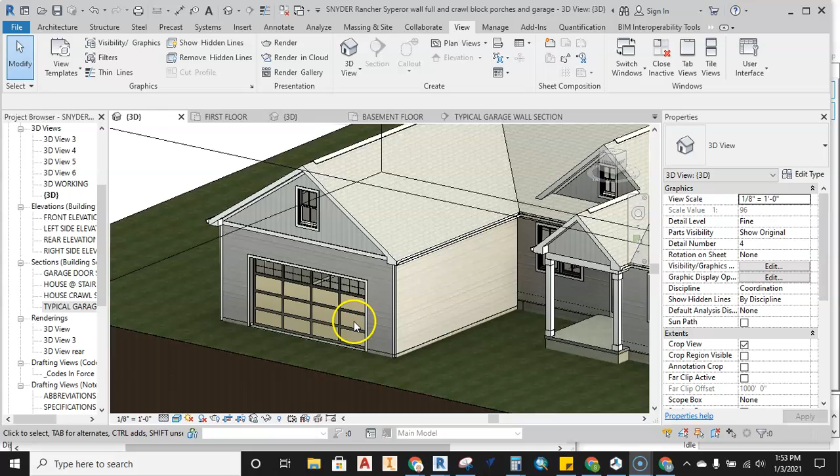So when we're taking a look at a typical garage wall foundation, you can see we have a 4-inch concrete slab. This is what the cars drive on. There's stone underneath, of course, undisturbed earth. Then you have your foundation wall, and this is a stacked wall.

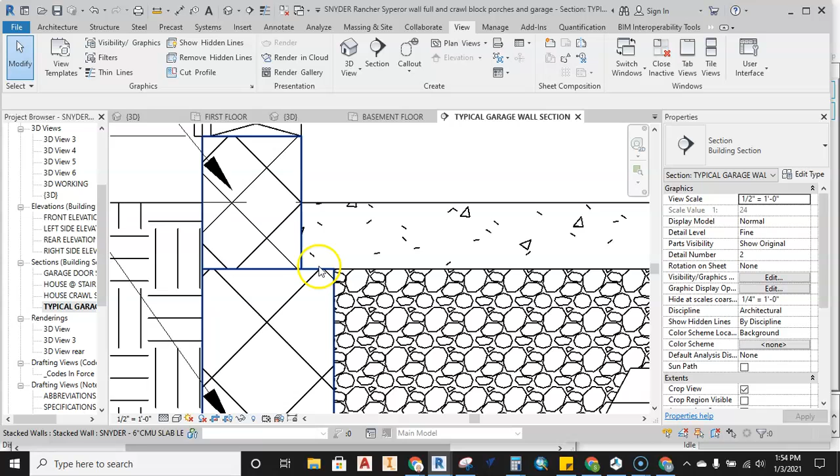This is a 16-inch by 8-inch thick concrete footing, and then we have our CMU 8-inch block that steps back to a 6-inch block at the top. What that does is it creates this ledge. This is a 2-inch ledge that the concrete can sit on, so it supports the concrete at the entire perimeter.

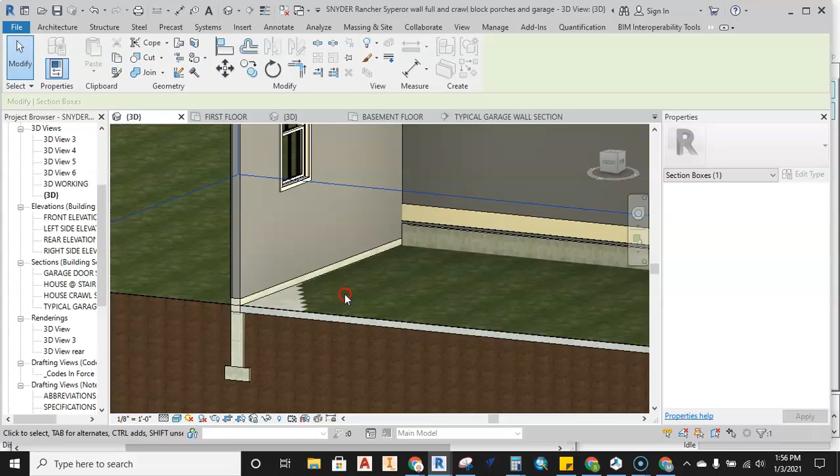This can be easily recognized or seen a little bit better here if I take this section box and drag this into the garage space. You can actually see how the garage slab here, this gray slab, is actually now sitting on top of that foundation wall. There's that 2-inch lip, and that slab sits on top of that foundation wall just like that. So there's your concrete and the slab.

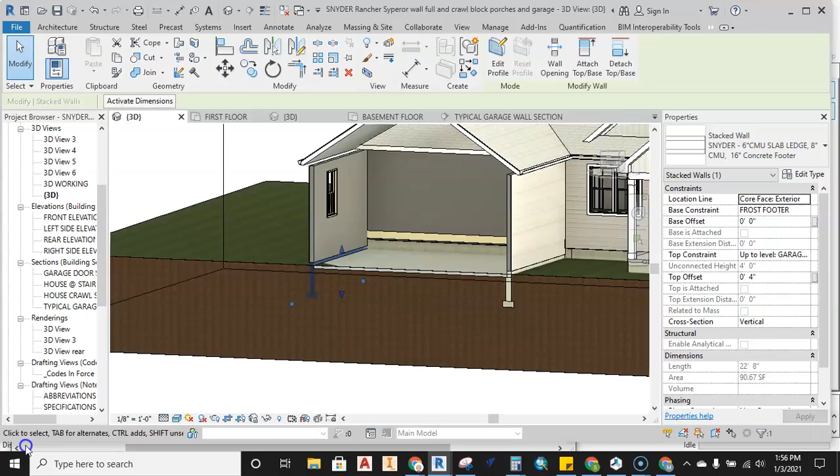So let's go ahead and start working on building up this stacked wall. Now, the stacked wall has 3 elements to it. The first is the 6-inch CMU, the second is the 8-inch, and then of course the last is the footer. You have to have these 3 elements built first.

So if you haven't built these elements before, and you don't have these built up in your project, then you need to build them. So in architecture, go to your wall tab, or your wall tool, and then you're going to come in here and make sure that you have these. So here's my 8-inch CMU.

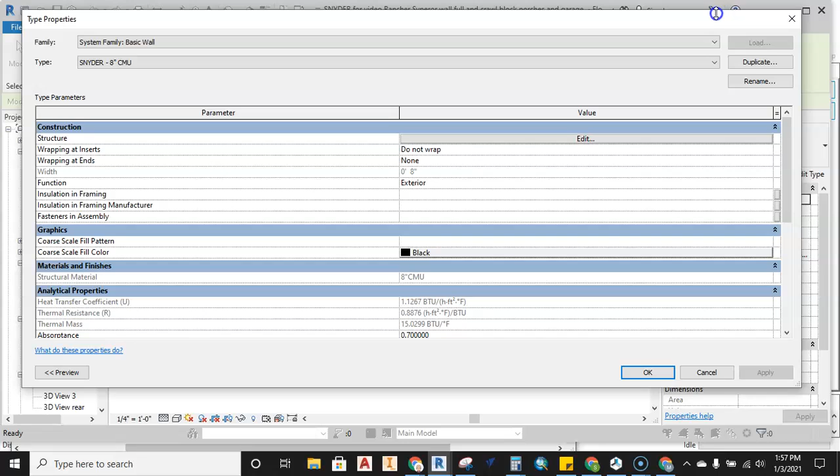If you do not have one, you can start a new wall. You can duplicate and rename this to be your 8-inch CMU. Go ahead and set your 8-inch CMU to 8-inch thickness. We should all have this by this point in time in the course.

And then also you wanted to do the same thing. You could take and make a 6-inch. So you'll go ahead and create the same thing for a 6. Now, I know that I have one in here somewhere. There's my 6-inch CMU. And then also you want to make sure that you have a footer.

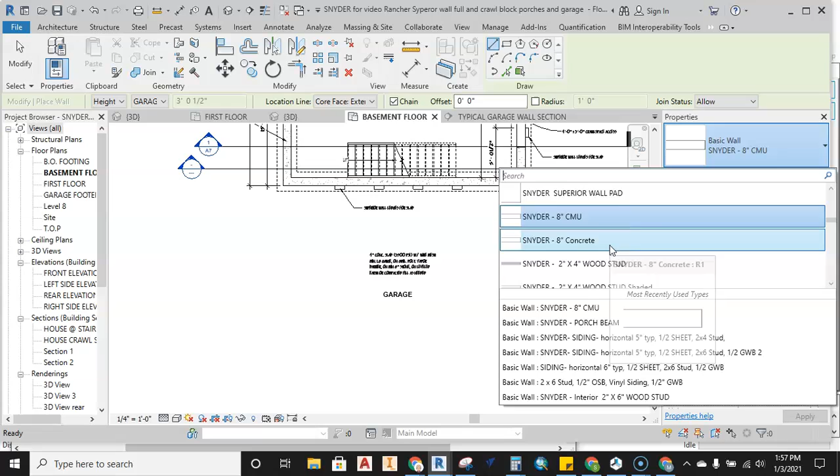So I have an 18, I have a 24. You got to make sure that you have the footers that you are looking for when you're going to go ahead and build out your stacked wall.

So once you have these elements put in place, then we can go ahead and start working off of the stacked wall. So I'm going to grab my wall tool, come here and go all the way down to the bottom of your wall options and find all your stacked walls.

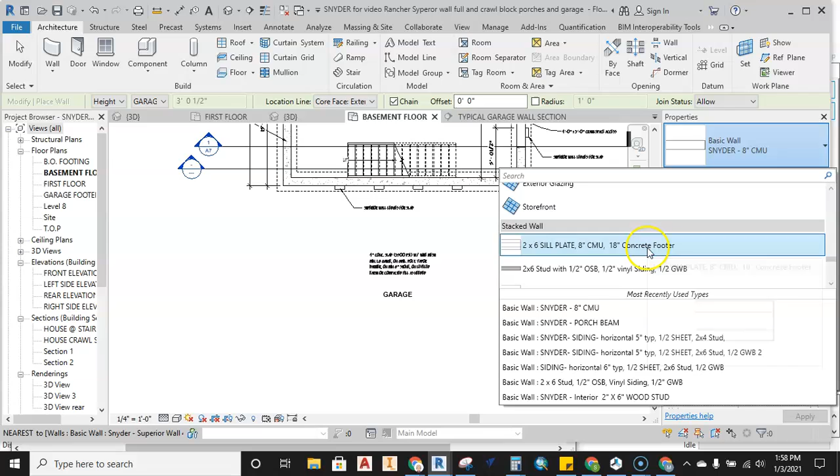So here's stacked walls, and the footer that we're looking for, or the stack wall that we're going to build, is this 6-inch CMU, 8-inch CMU. Nope, not a 12 - we don't have a brick ledge on it. So let's keep going down here.

We're going to do a 6-inch CMU slab ledge, 8-inch CMU with a 16-inch concrete footer. So this is the actual wall we're going to build.

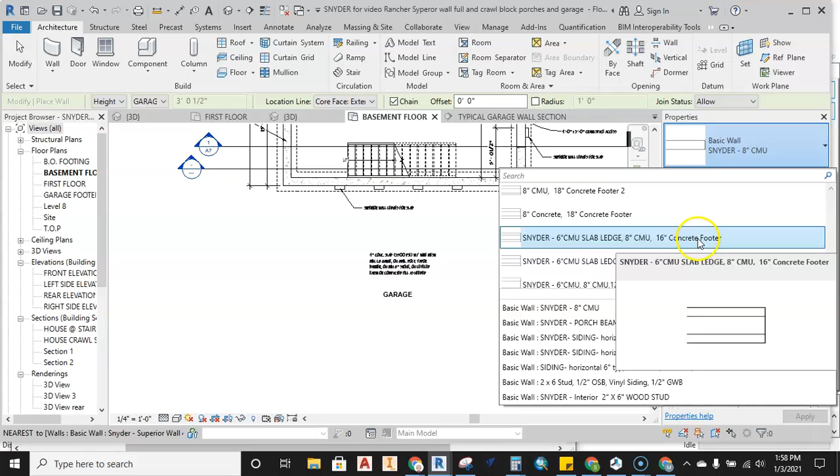So let's go ahead and take a look at what it looks like as a built-up wall. So when I jump into here, here's my section, and you can see that I have a 6-inch on top, and the height for that 6-inch is going to be 8 inches tall. It's because it's an 8-inch high cinder block.

Next one coming down here is that 8-inch CMU. Now this is going to be variable depending upon the grade on the home and how low the slab is. This could change, so we make this one variable. And then your 16-inch concrete footer sits on the bottom, and that is an 8-inch thick concrete footer.

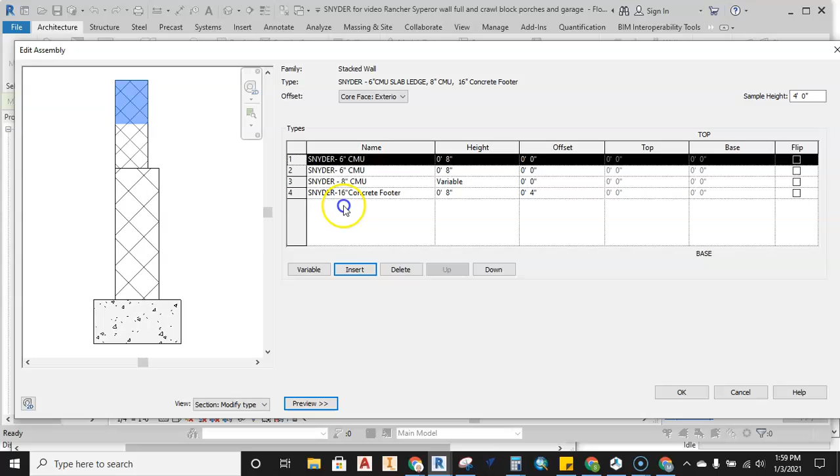So as you have done this before, just make sure you insert the necessary walls. And of course, I just added another 6-inch to the top. And then you can scoot these things around. You can delete them, you can keep them as necessary. Okay, and they show up over here on the left side. We've built these up before.

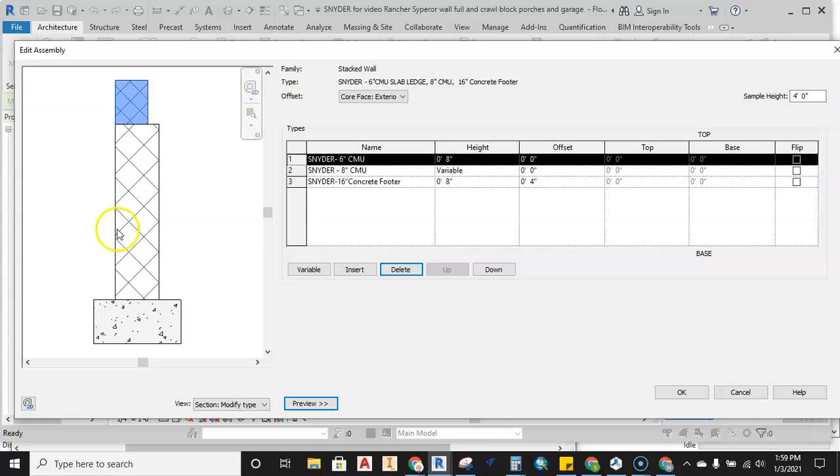And then make sure that they're offset so that the outside is flush with your cinder block, with the 2 cinder blocks, making that 2-inch lip for the concrete. And then, of course, the bottom is your concrete footer. Then you'll have to offset that by 4 inches so it's centered on your CMU. So make sure you get all that set up, and then you can go ahead and hit OK.

Once you have this all set and you're ready to rock and roll, then what you want to do is make sure that your levels are correct, okay? Because we're not going to build this thing down to this basement floor.

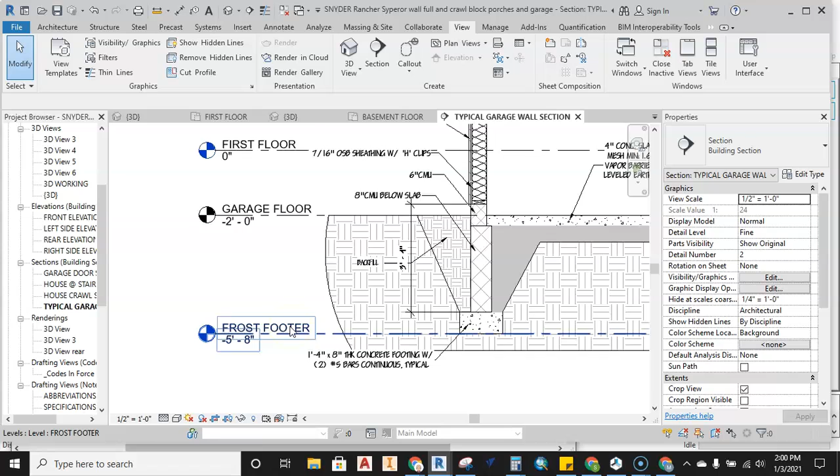Let's go take a look at this typical garage section, and you can see that the frost footer for the garage is at -5'8". So that's the basis of our wall, and then the top of the wall is going to go up to our garage floor. That garage floor is set at 2 feet below the first floor, so that's going to be the height. However, it's going to extend up 4 inches. All right, so those are the levels we're going to be working with.

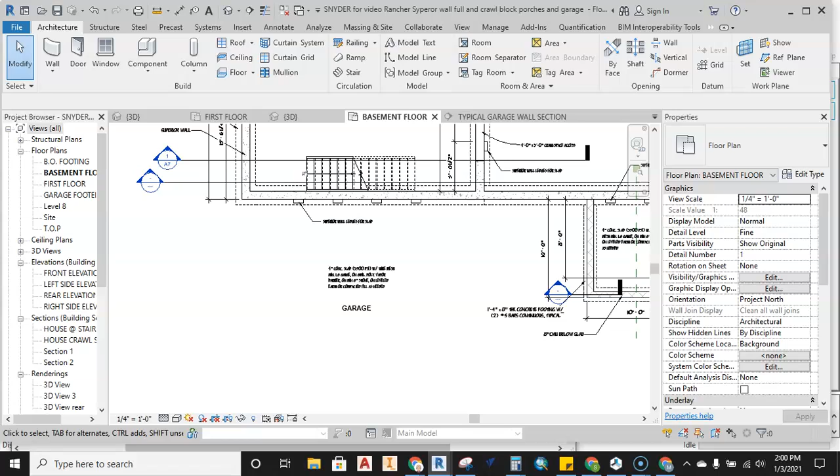So back here to the basement, we're going to go ahead and make sure we grab that wall again. So there's my stacked wall, concrete footer. It's all good. Base constraint, we're going to go in and find that. Do we have that frost footer in there? Or is it called garage footer? There it is, garage footer. Must have been in a different file. Garage floor, garage footer. Want that one for the base constraint.

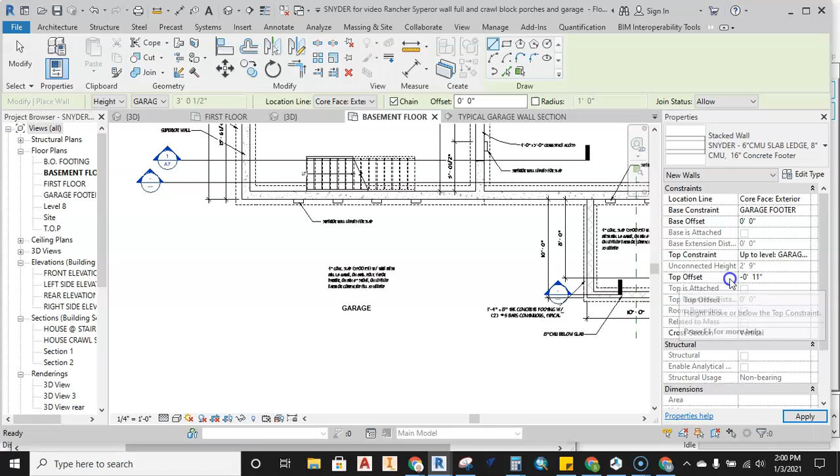Top constraint, we're going to go in and we're going to find that top constraint to be that garage floor. All right, and then my top offset, that was going to be 4 inches.

So to make sure I'm going to be drawing directly underneath of the walls, I'm going to go to my first floor where I have my wall set up. I'm going to do this again. I'm going to then set that same wall up. Base constraint is going to be based off of that garage footer. Top constraint is going to be based off of the garage floor. And there's my 4-inch offset still there.

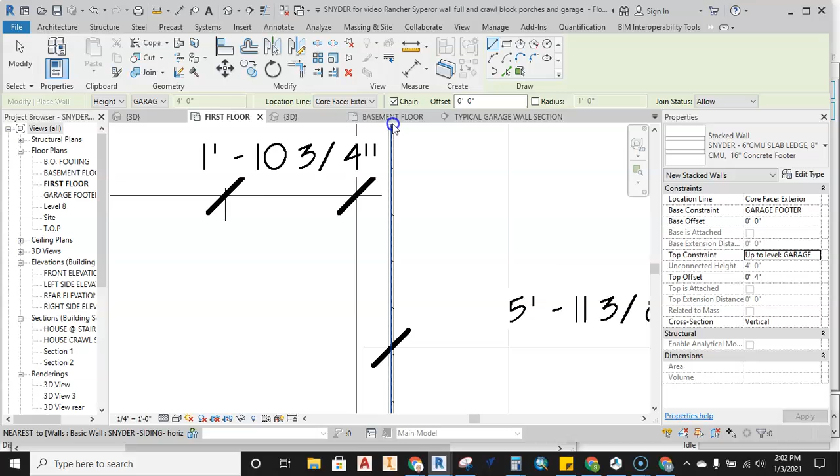Then what I'm going to do is I don't want to attach this to the house yet because I don't want things to get linked up there yet. But what I am going to do is I'm going to go ahead and start. I want this to be directly in line with that sheathing layer.

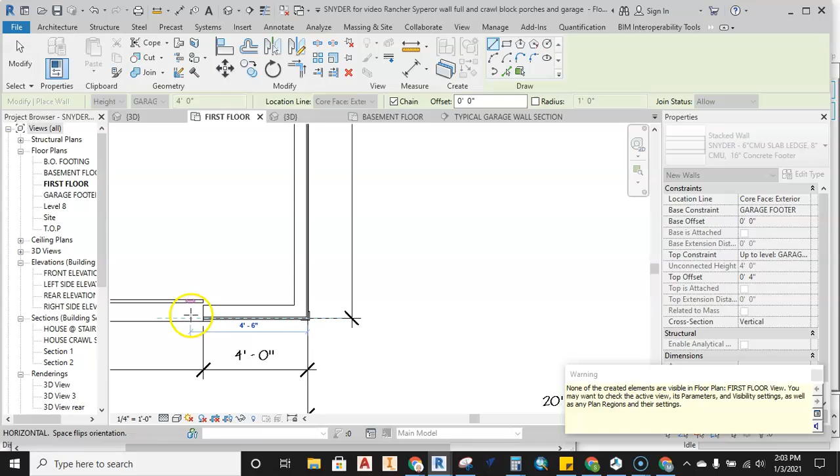Okay, so I'm going to go ahead and then click, and I'm going to start drawing, now drawing underneath of the wall, okay, coming all the way out, and I'm going to keep working my way around. Now, it's going to tell me that you can't see what you're drawing, and that's fine, simply because it's underneath of the wall, and it's not in the view. So I'm going to get back up here close. But I don't really want this to join up to the house yet.

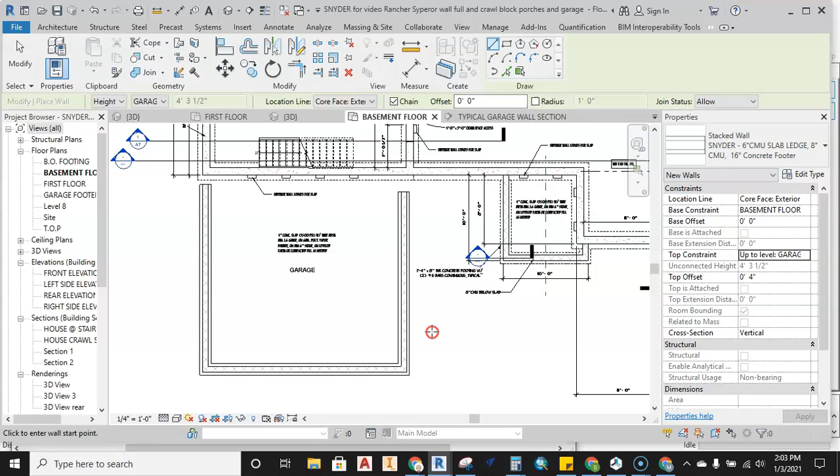So I'll go back to my basement floor, and you can see I was drawing a foundation underneath my house, and that things are going to line up, all right? But I don't want them to join this wall yet because they're different heights, all right? Because they're different heights, we're not going to want this to automatically clean up with this wall, all right?

So what I want to do is I want to then use this tool right here, wall joins. I want to select it, mouse over it, and there's 2 boxes. There's a big box, which is dealing with the footer. Then there's a small box, which is dealing with the CMU. Then there's actually a third box we can't see that has to do with the 6-inch CMU.

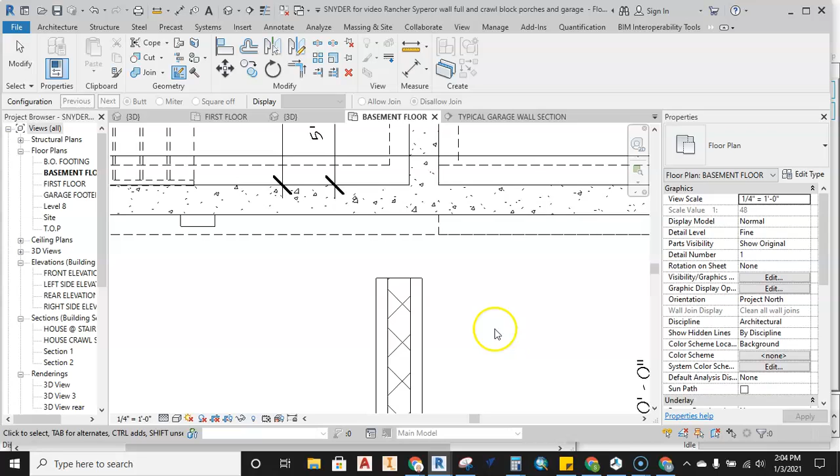So the first one I'm going to select, and I want to say this is with my footer, disallow the join. Okay. Then I want to go from big box to little box. Same thing, disallow the join, okay? Because when I then select the wall, a little symbol right here that pops up means it will not link up with the house wall, okay?

So I'm going to do the same thing over here. In fact, I'm going to pull this back away from this house a little bit because I don't want it to join the house wall. All I want is it to butt the house wall. So I'm going to mouse over big box, disallow the join, little box, disallow the join.

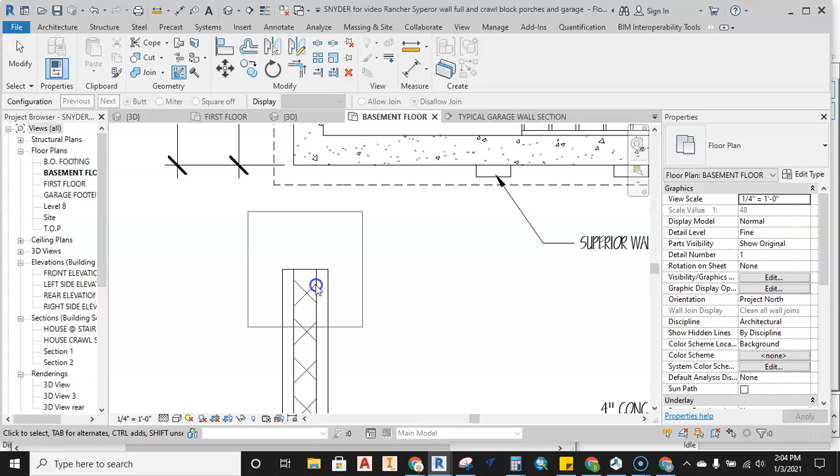Okay, now, the next thing I'm going to do is I'm going to take and temporarily raise my view range. Okay, we're going to go up until I can see the 6-inch block that sits on top of this. All right, so we'll go up here, 7'6". Is that high enough?

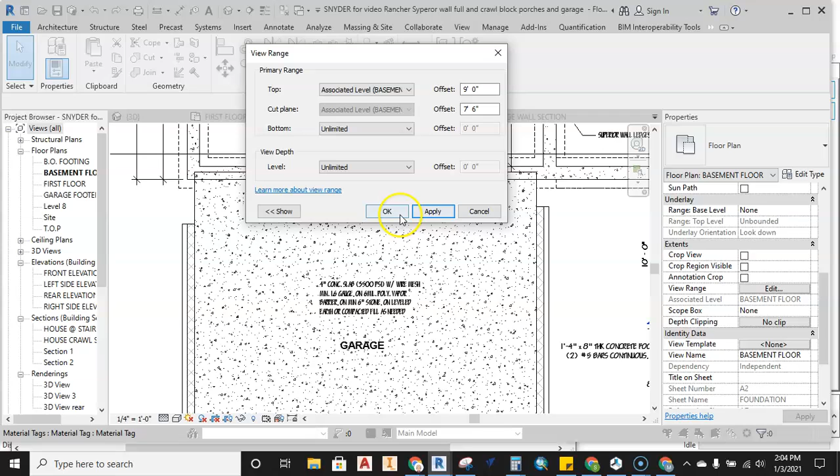Hit apply and then see. Am I going to grab that 6-inch? Yes, that 6-inch block, as I can see it, because there's my concrete slab that really we haven't drawn yet. So let me just delete it. So there's the 6-inch block. So I need to do the same thing one more time to disallow the join for that 6-inch.

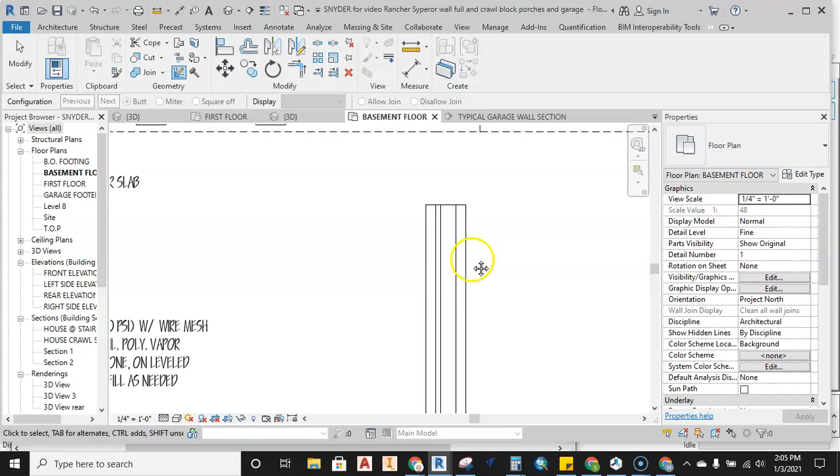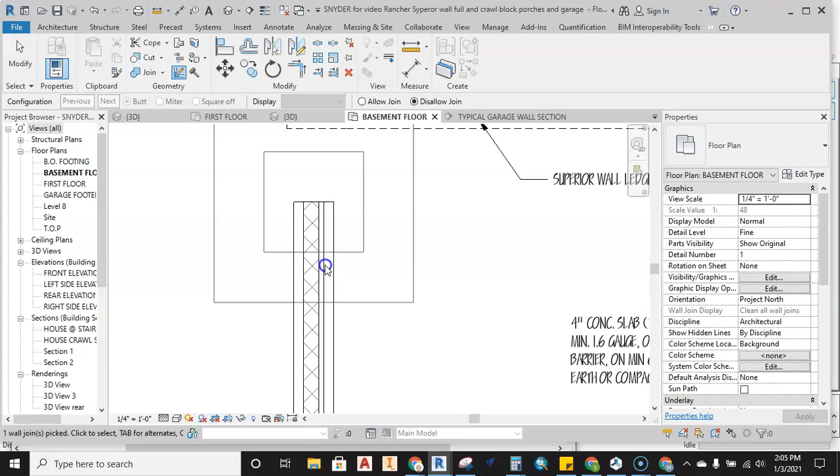So I should have big box, little box, and then it should be, yep, click on that one. So I'm working on that little box. So big box, little box, and smaller box, disallow that join. All right, so if you go back and check these out, just put these join tools over top. So big box, disallow the join, good. Next smaller box, disallow the join, and then smaller box even yet, disallow the join. That's those 3 options in that wall.

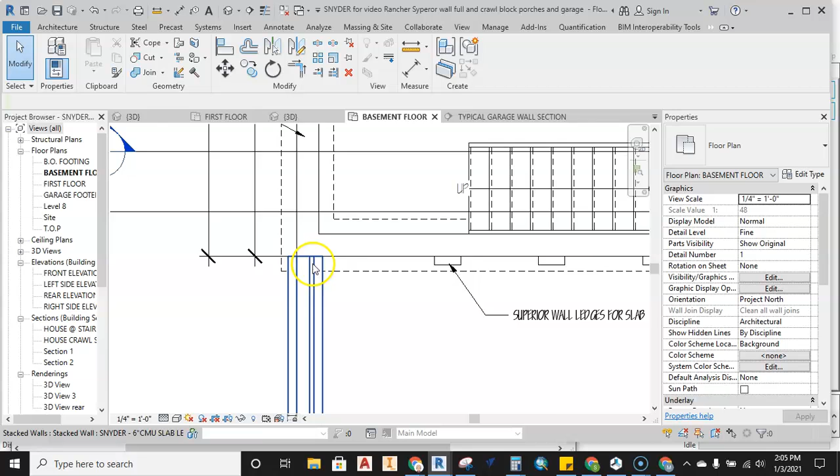Now what I should be able to do is just take this and push this into this wall, and it should not link up. So let's see what happens here. Boom, that's all I needed. In line and not linking or joining into that foundation.

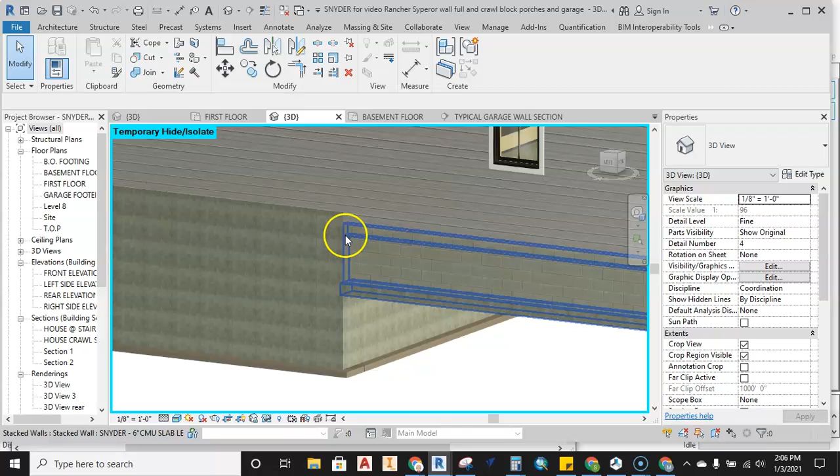When things want to start joining up, stacked walls at different heights and different, whoops, wrong drawing here. Where are we? Let me find the right 3D view. Yeah, this is the right one. When these heights want to link up, so they got different type walls, different stack walls, different heights, things get really messed up in here. So you really want to follow along and join those up that exact way.

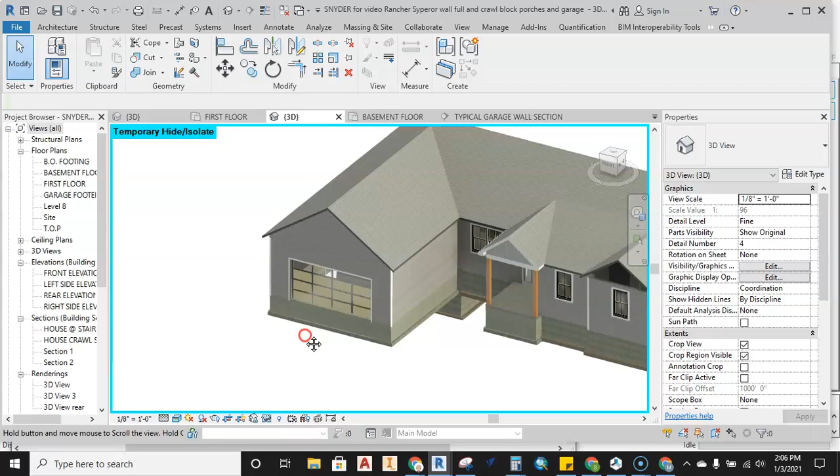All right, so now the next thing we're going to do is let's get a concrete slab in there, and then we're going to join the concrete slab so that our door doesn't run through the slab. Let me show you what that looks like. My first floor, I'm going to go ahead and make a section just so you can take a peek at what's going on here in this door. So we'll flip it so I'm looking at it in that direction.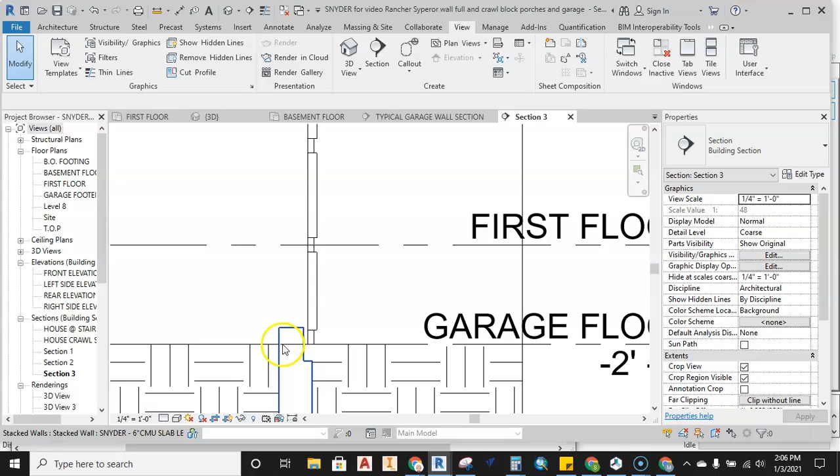So here, we cannot have the garage floor with the door coming down, hitting, and then have a 6-inch block in the way, because this is where our slab's going to sit right here. So let's go ahead and add the slab, and then we're going to join these two things together so that that all cleans up nicely. So to go ahead and do that, let's get back here to our first floor, and we can go ahead and grab architecture. We want to grab a floor system.

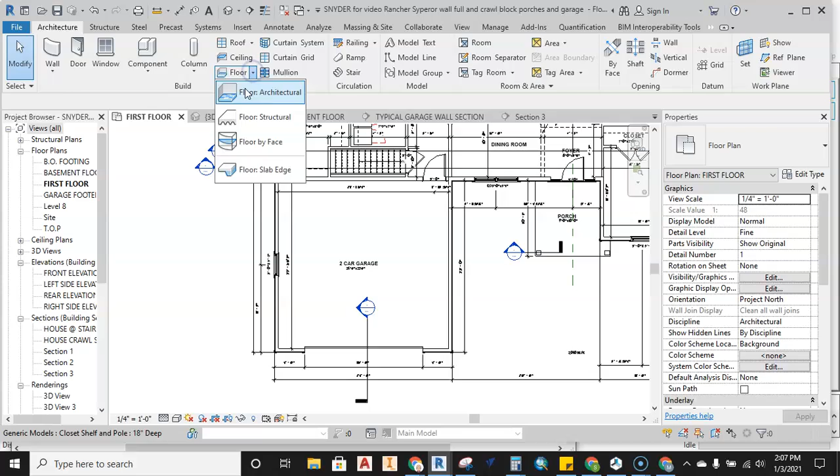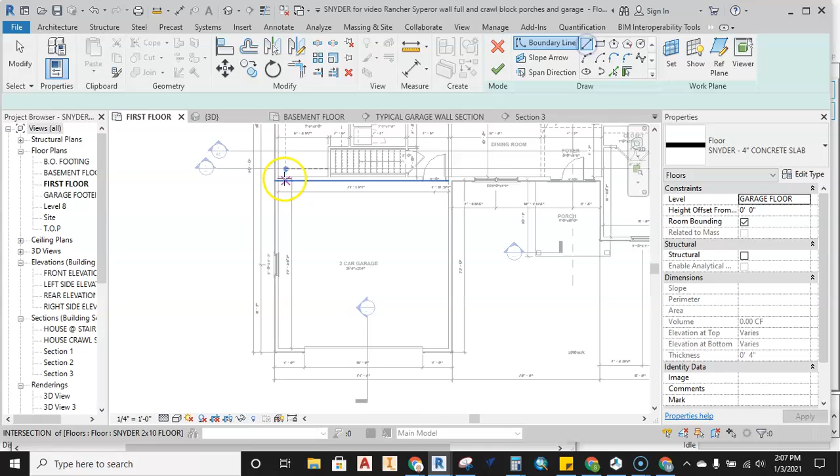And here we want to go in and find a 4-inch concrete slab, which we've done concrete slabs before. Make sure it's set up as a standard concrete slab. And right now it's based off of the first floor. I don't want to base it off the first floor. I want to base it off of my garage floor. So with that set, I'm going to go ahead and then draw in, but I need to be overhanging. So I really should be looking at this on the basement floor. There we go. Because I want to be sitting on this lip. This lip right here is where I want to be looking when I'm drawing this concrete slab.

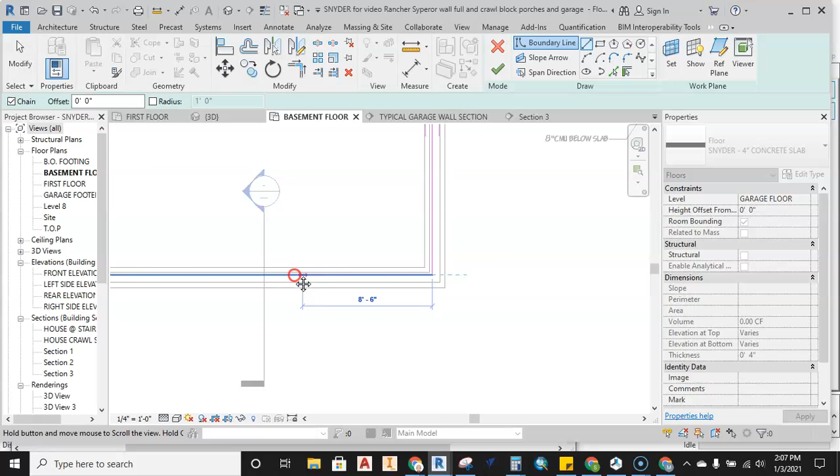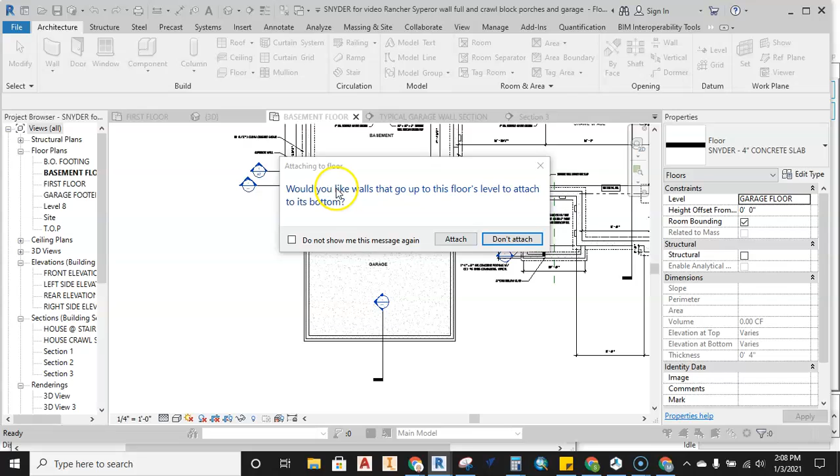So I'm going to come out to here. Now that garage door is going to be right around here somewhere. So I'm coming across. What I'll probably do is just let this run all the way through. And then I'll go back in and add the apron on this concrete slab. I'm going to come all the way across here. All right, good. Because I'll show you what that looks like. So I'm going to say don't attach. And let's go in and look at this section.

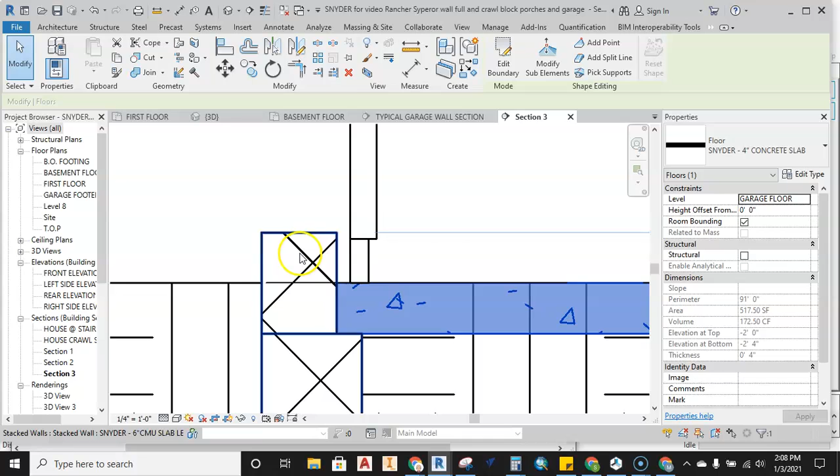So now you can see the section is right here. This is my concrete running over and it's hitting this 6-inch block. So we got to get this 6-inch block out of here and join up and let this slab run through here so that you can drive over top of that slab and the door comes down on top of it. So what we want to do is go ahead and get that set up. So to do this, what we're going to have to do is actually cut this foundation wall and then remove or turn the slab into a different wall there so we can remove that top course of block.

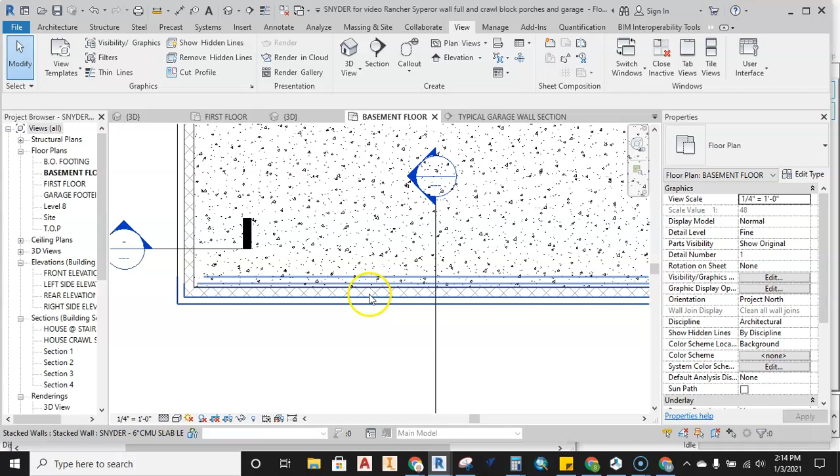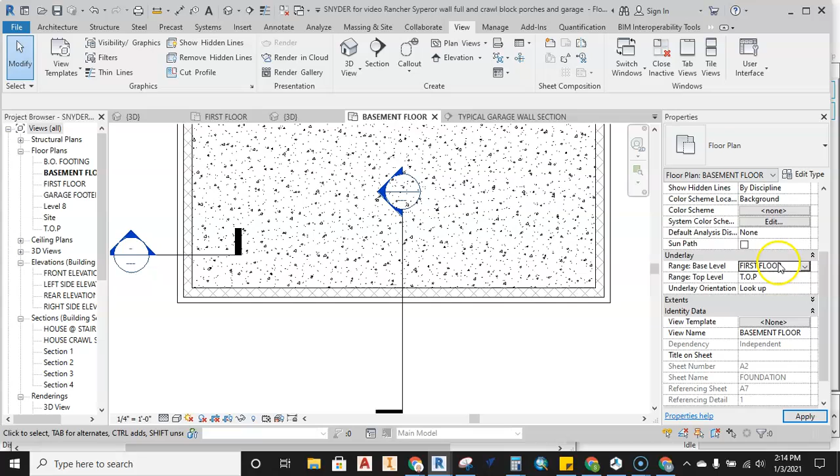So to do this, we got to find out where that garage door is sitting. So what I'm going to do is set this up so we can see the garage door in this particular view. And we're going to use this tool over here, which is the underlay tool. So let's go find, where's that underlay tool? Underlay tool. So we'll go in and we're going to find the first floor. Come back over here, and what I want to see now is I can see the edge right here where that garage door is slicing through that block.

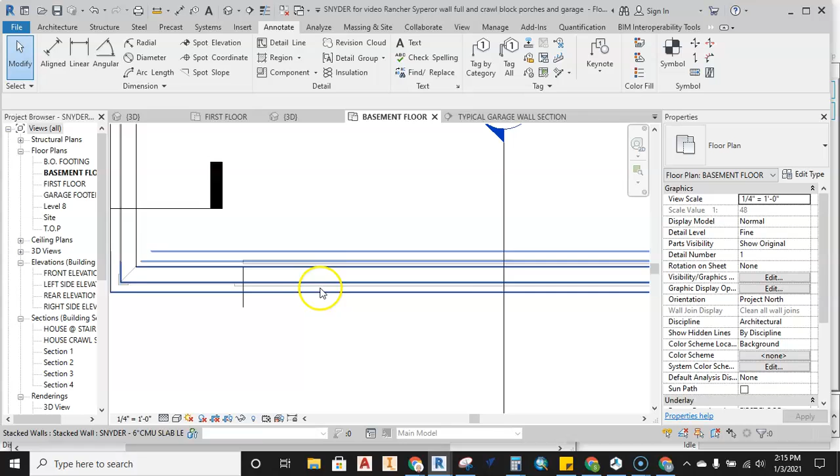Now what I want to do is put a line right here where that garage door line is actually running, because I want to slice that block basically 1.5 inches over, because this is a 16-foot garage door. You want to actually cut enough of that block out so that you can put some framing material in that space anyway. So we're going to make a 16-foot 3-inch hole for the garage door here.

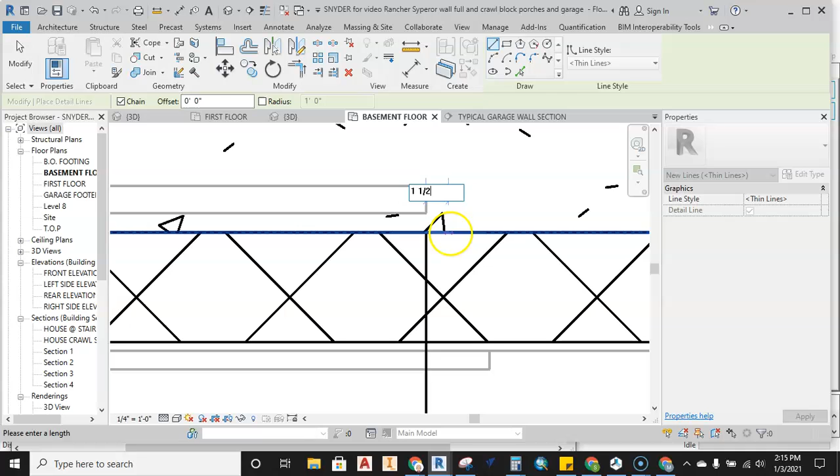So to do this, now that I have this in position, I'm going to go ahead and draw over 1.5 inches. Notice I'm drawing some lines in here to do this. At that point, that's where I'm going to cut the wall. So I'm going to come up here to this split element tool, all right? I'm going to mouse over the wall right here, and I'm going to click that line. What that's just done is split this element.

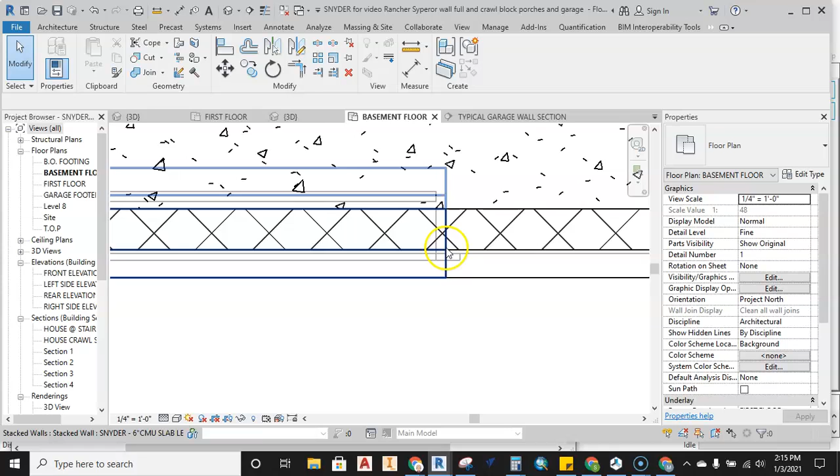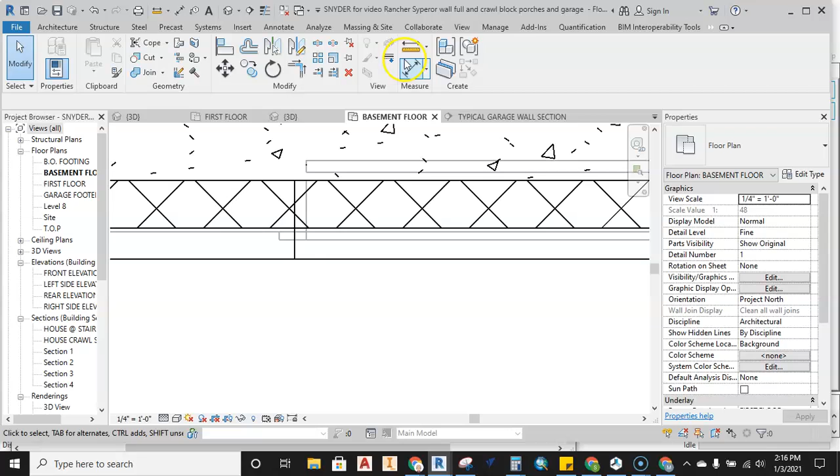I'm going to go ahead and immediately delete these lines that I used, and come back over to this side. I'm going to again grab my annotate, my detail line. I'll draw over 1.5 inches and just come up to give myself a reference point. Grab my split element tool, cut that wall there, and then delete these lines because I don't need them. And then that distance from that point to this point should be 16 feet 3 inches, because that's going to be the rough opening of my block.

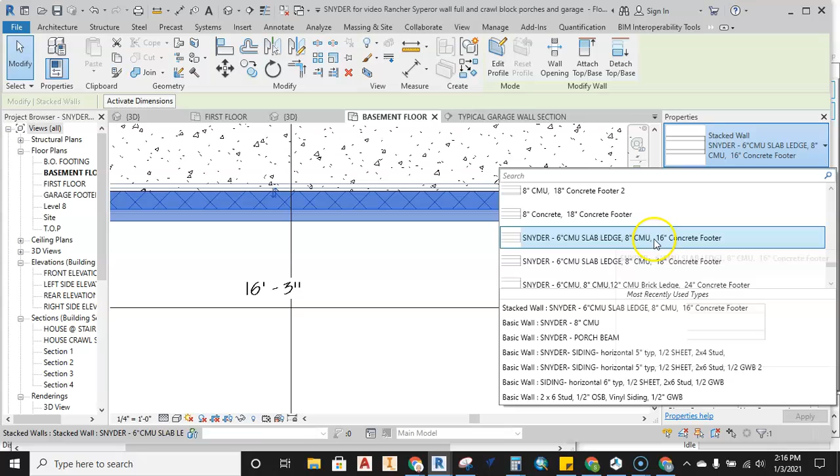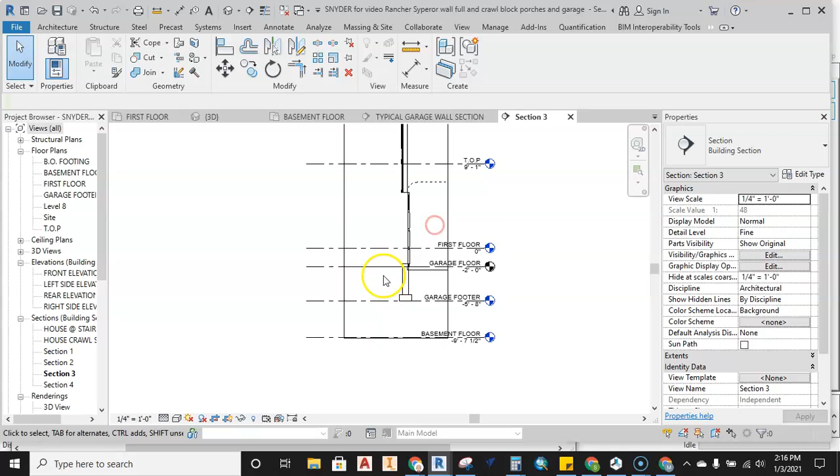Then I'm going to take this wall and change it from being just a stacked wall to an 8 and 16-inch footer. So let's go find, there's an 8 CMU 16-inch footer. That's what I'm going to use, because what I don't need is that concrete block sitting on top. So now with that taken care of, I can start editing my slab, because if I look at my section, you're going to see that this concrete block is sitting on top of here. So I could take that block and have it come down below my concrete slab right there. Now I can push that apron through.

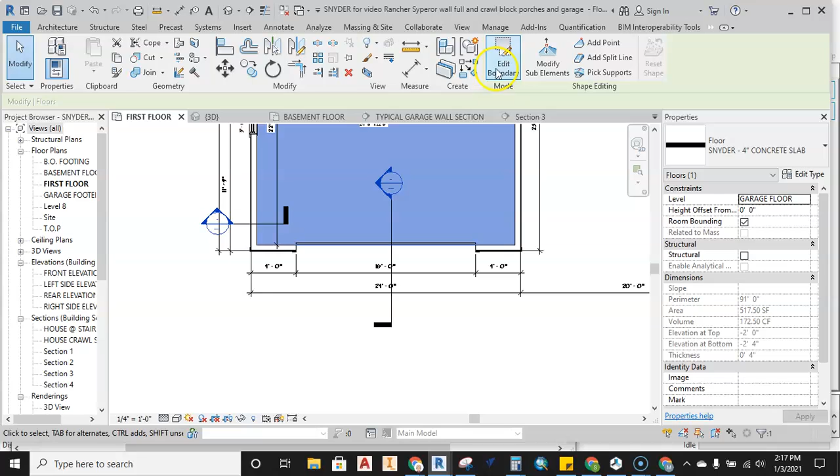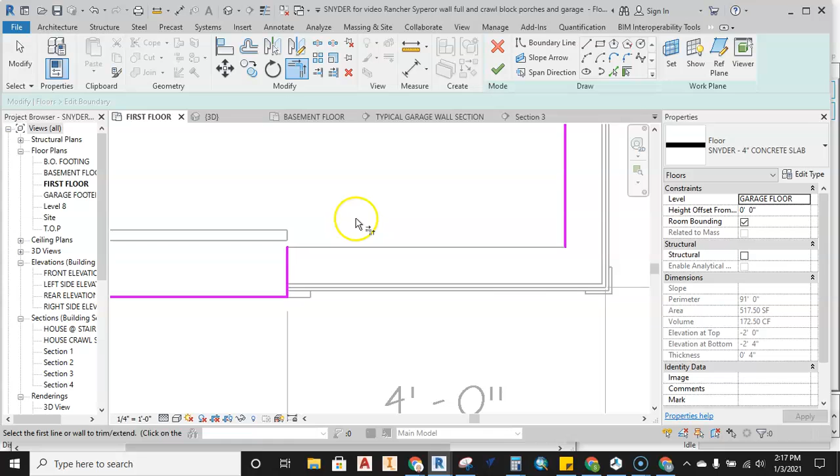So I'm going to go ahead and select the slab. Let's do this on the first floor, probably the easiest. We're going to head here and hit Edit Boundary. Now I can simply change the way that this concrete slab sits, and it then comes out for the apron. Now I'm going to use my little trim tool here, where I want to keep this line and keep this line. Unjoin the elements. I've got to go over here and add this line back in and go across here like this. Now I've extended my concrete so it's underneath that door, a little apron area there to clean this up.

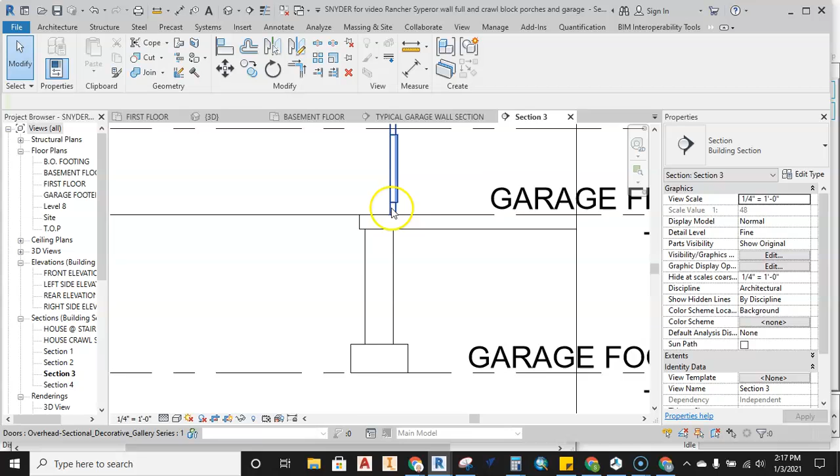Don't attach the walls, and let's go take a look at that wall now. The block runs up to underneath the slab, the slab sits down, the door sits on that. All that looks nice and pretty. Now let's go back to the 3D view and see how this looks. You can see that concrete poking out from underneath the wall. To get this perfect, we would end up moving this over 1.5 inches. You can see where that apron is not totally perfect there.

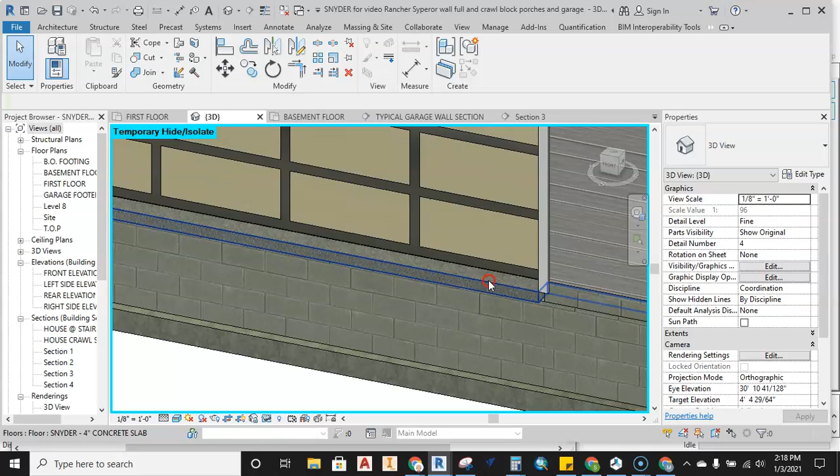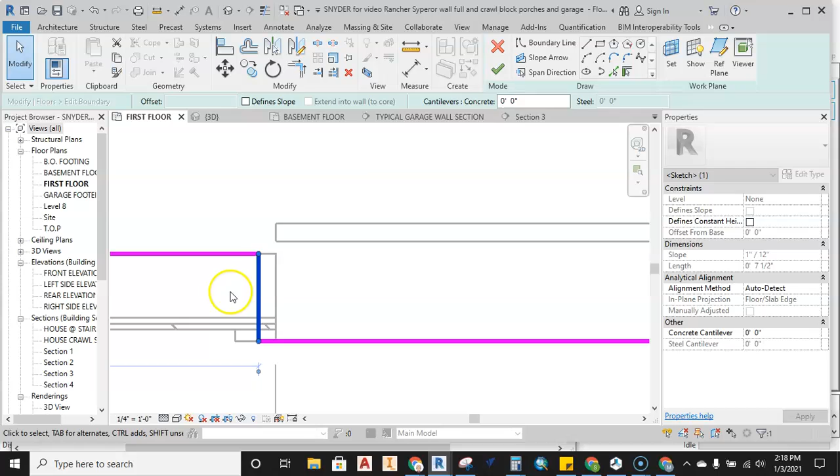Pretty simple to do. Edit the boundary, and you can do it in this view, or you can jump back into this view, and we just move this over just that distance for the rough opening, 1.5 inches that way. We'll move it this way, and we'll do 1.5 inches this way. All right, so that takes care of that, and we jump back into the 3D to take a look. There it is. You can see it's all filled in nice and tight.

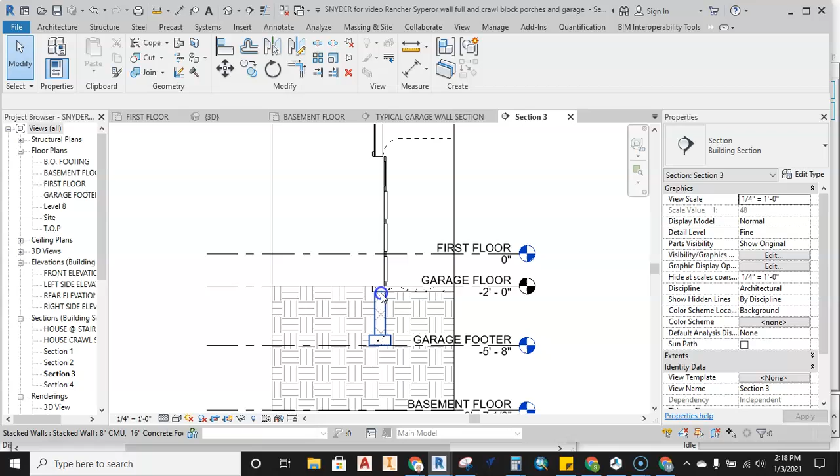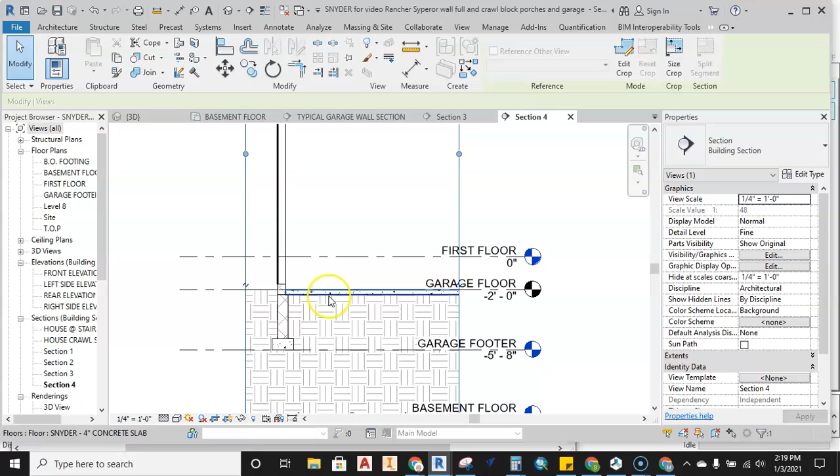So hopefully this helps you work through how to get your garage wall set up, how to get things tidied up with your slab, and see how this all comes together. Now, if we look over here, you can also see that the slab is running. Move this out of the way here. That slab's running right there to the ledge. Okay, so again, hopefully this helps get you through setting up your garage foundation and your slab for the project.